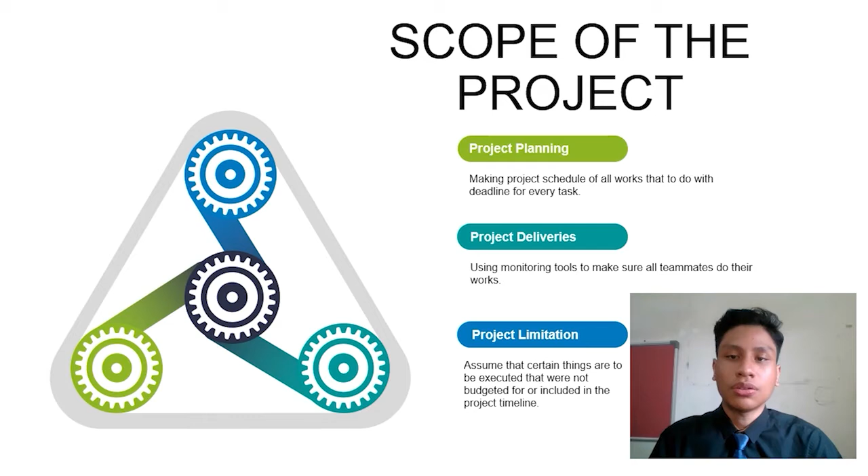Scope of the project. The first one is project planning. Making a project schedule of all work to do with the deadline for every task. And the second one is project deliveries. Using monitoring tools to make sure all teammates do their work. And the last one is project limitation. Assume that certain things are to be executed that were not budgeted for or included in the project timeline.

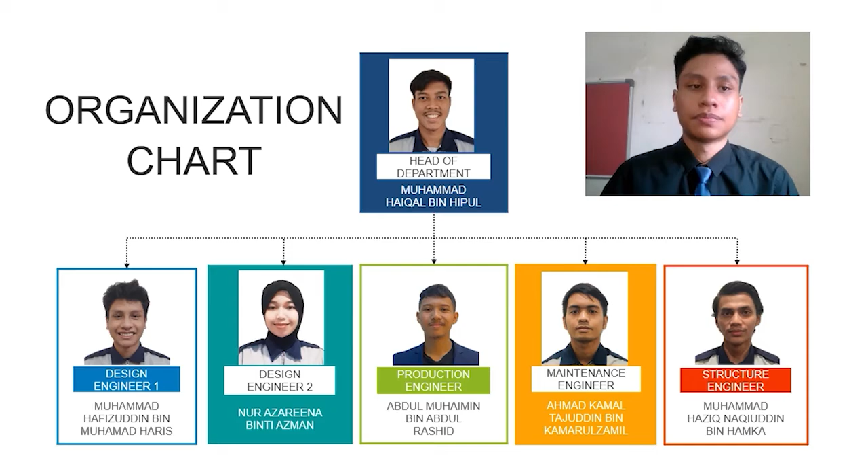Job scope. The head of the department, Muhamad Haiqal, will be in charge of planning the project and monitoring progress. The head of the department will also be in charge of the planning meeting for the mechanical department and ensure all tasks are complete in the time frame. Me as a design engineer will design CAD for main body parts of the product and be responsible to modify the existing product and analyze the main body part.

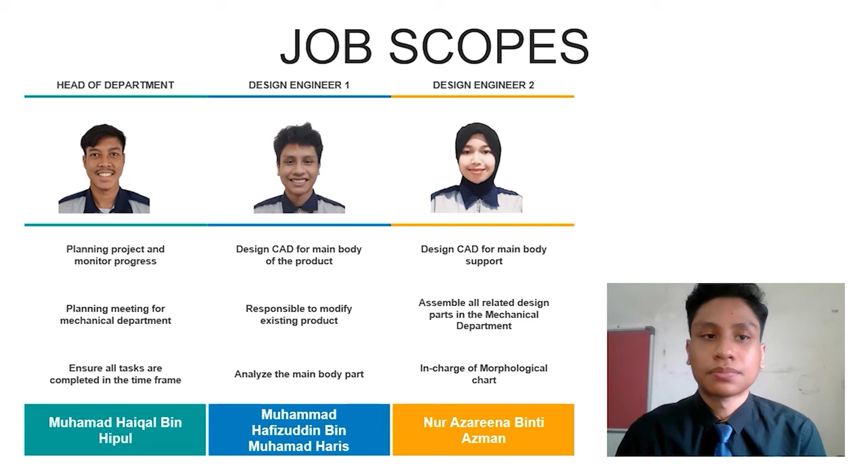Nur Azareena as the second design engineer will design CAD for main body support and assemble all related design parts in the mechanical department. Nur Azareena is also in charge of morphological chart. Production engineer Abdul Muhaimin will be in charge of drafting all design parts of the main body, analyze calculation on the main body, and also estimate budget costing for the product.

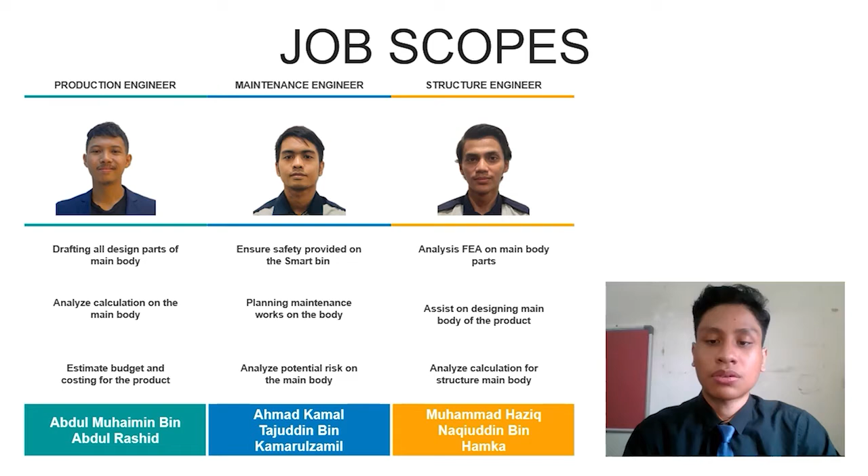Ahmad Kamal Tajuddin as a maintenance engineer, ensure safety provided on the smart bin, and in charge of planning maintenance works on the body, and also analyze potential risks on the main body. Muhammad Haziq Naqiuddin, as a structure engineer, will be doing FEA analysis of the main body parts, assist on designing the main body of the product, and also analyze calculation for the structure main body.

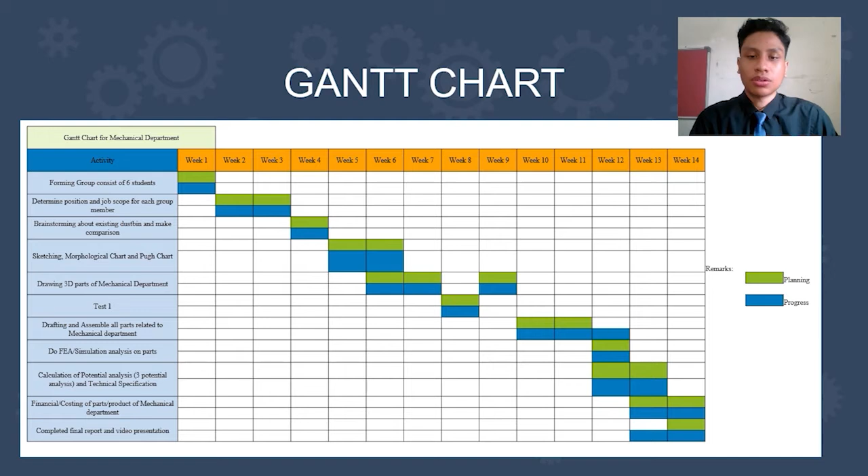Gantt chart is one of the monitoring tools that will be used in our project. Google Meet is one of the platforms that we use to discuss the project. Minutes of meeting are also one of the monitoring tools that we use in our project.

Contingency plan. The first event that we face is the cost to fabricate is too expensive. Search and make a survey from all markets to find an affordable price is our response. The contingency plan is to change the part with different brands with cheap price. And the second event that we face is mistake in product design. Our response is a meeting among team members and seeking help from the supervisor. And the contingency plan is to prepare several designs for the project.

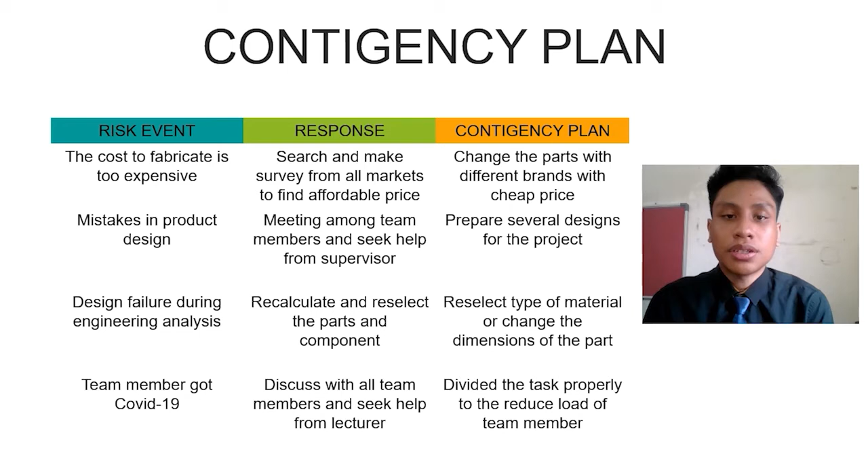The third event that we face is design failure during engineering analysis. Recalculate and reselect the parts and components is our response. Reselect type of material and change dimension of the part is the contingency plan. And the last event that we face is team members got COVID-19. Discuss with all team members and seek help from the lecturer is our response. The contingency plan is to divide the task properly to reduce load of the team.

Assalamualaikum warahmatullahi wabarakatuh. My name is Abdul Muhaimin bin Abdul Rashid. Today I will be presenting about the costing of our product, Smart Tech Bencom. For the costing, there will be 3 categories, which are bill of material, total cost, and the balance sheet. For the bill of material, I will tell you about all the components that we use to construct the product of our company, which is SmartBin.

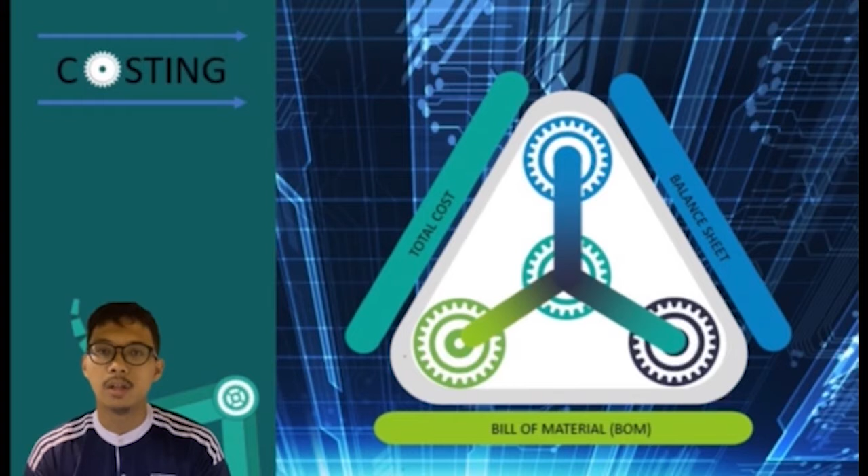For the total cost, I will tell you about the price of each part, and at the end of it, I will tell about the total cost for the whole product. And for the balance sheet, we will tell you about all the assets, all the company liability, and the company debt ratio.

Now I will tell you a little bit about bill of material. First of all, you need to know that we have 15 components. The first component is body, the material is steel, and the quantity used is 1. The second part is back door, the material is steel and the quantity is also 1. Hinge, the material is steel and the quantity we use is 2. For the top plate, the material is steel and the quantity that we use is 4.

For the fifth part is the axle shaft. The axle shaft, the material used is steel and the quantity is 4. For the bolt, the material is steel and the quantity is 16. For the next part is fork. The material is steel and the quantity is 4. For the bearing, the material is steel and the quantity is 4.

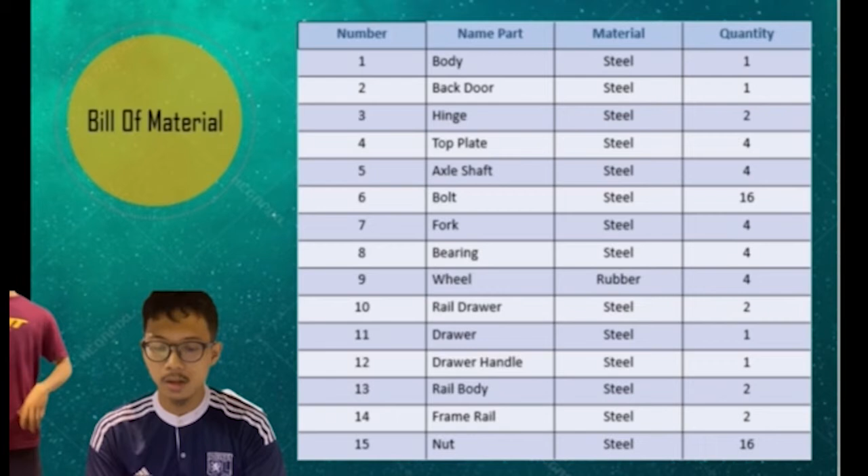For the wheel, the material that we use is rubber and the quantity is 4. For the rail drawer, the quantity that we use is 2 and the material for it is steel. For the drawer, the material is steel and the quantity is 1. For the drawer handle, the material is steel and the quantity is also 1. For the rail body, the material is steel and the quantity is 2.

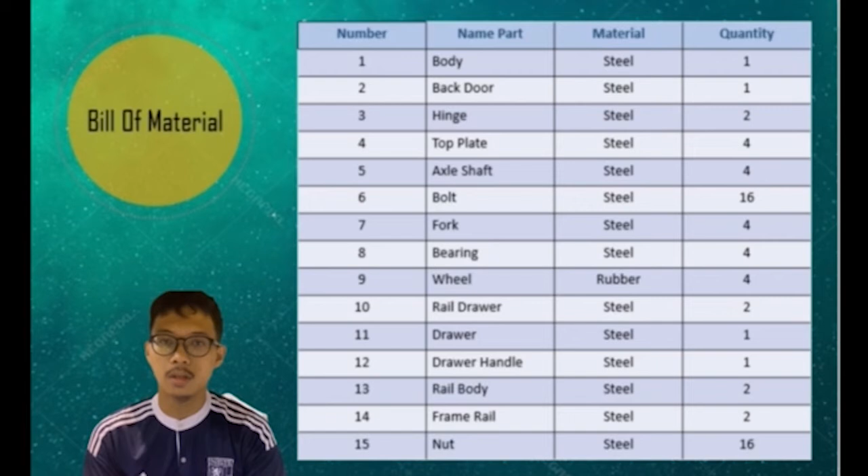For the frame rail, the material is steel and the quantity is also 2. And for the 15th part, the last part is the nut. The nut, the material we use is steel and the quantity of it is 16. The assumed total cost for this product is 350 ringgit.

For the balance sheet, there are 3 things that we need to know, which are assets, liability and debt ratio. For the asset, our company asset is $84. Our company liabilities is $270. And the debt ratio that we have is 3.21. That's all.

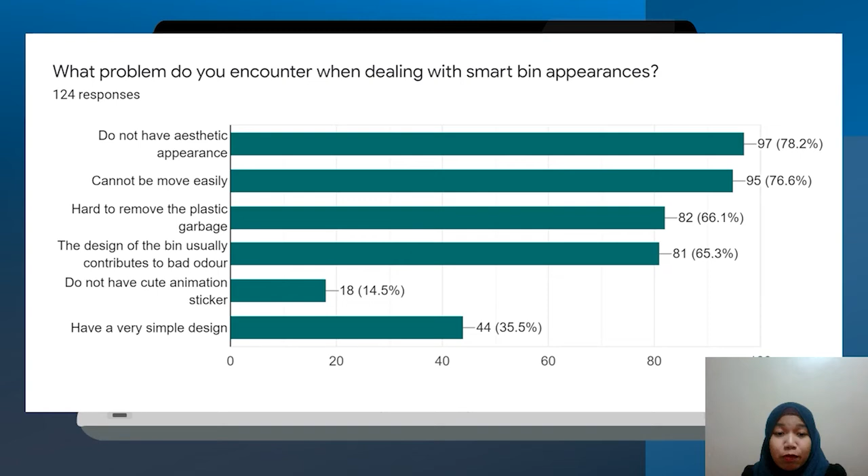Firstly, in order to identify the problem of the smart bin, a survey had been distributed and there are 124 respondents in total. Only 4 high votes had been selected to be the problem statement of the product. Let me explain to you the problem that most of the respondents encountered in a simple way. When you buy something, for example a bin, you tend to buy it based on the attractiveness of the product. Then, as you buy the smart bin, you tend to move it to a suitable place, so you need a bin that can move around easily.

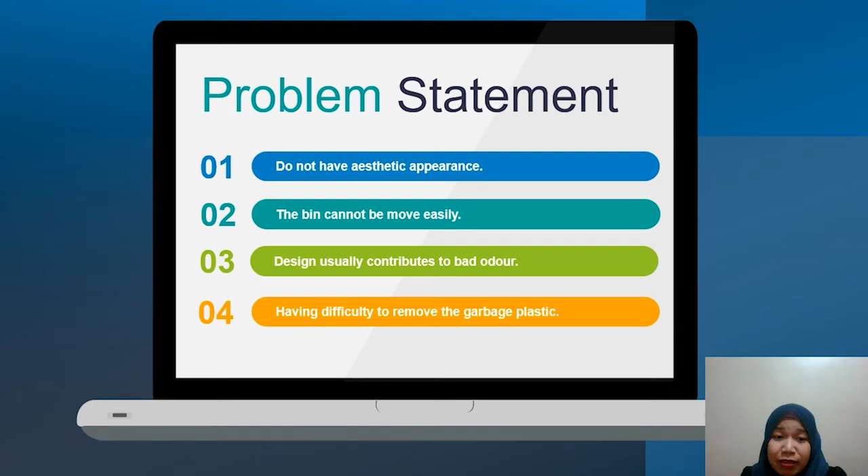When you use the bin, logically it will contribute to bad odor based on the design that the bin used and based on the waste that you have thrown. Once the bin is full, you will collect it and usually the garbage plastic will stick on the surface of the bin. Now, here are the objectives that I had made in order to give solution to the problem. It is basically the opposite of the problem.

Imagine that you will have a smart bin that has aesthetic features which look good in your kitchen. Imagine that your smart bin will make sure that your house does not have bad odors. Imagine that your smart bin can be moved easily from one place to another. Imagine that you can collect the plastic garbage easily from the smart bin.

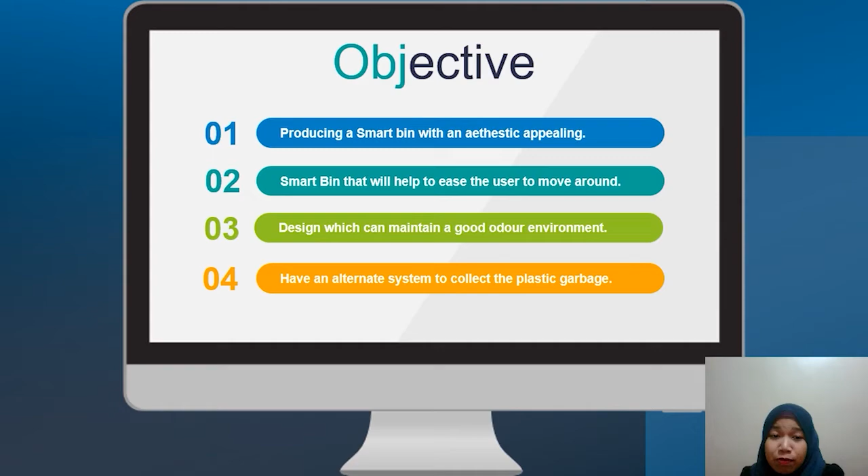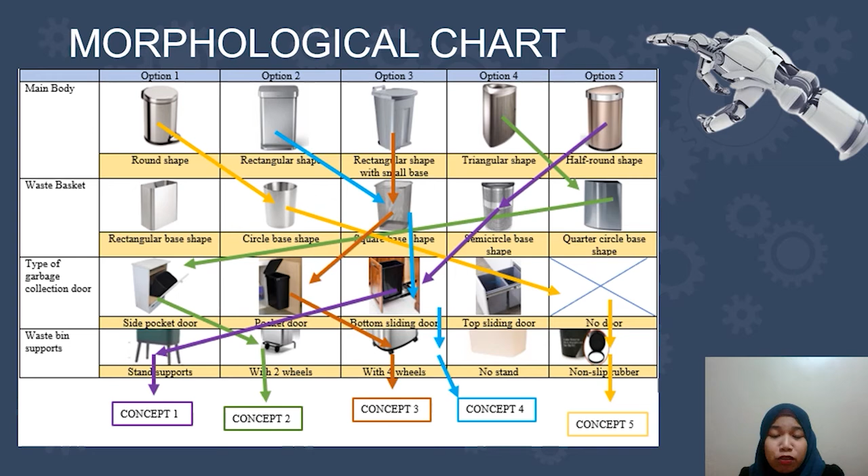As for the concept generation, I had used the morphological chart with random designs of main body, waste basket, garbage collection door, and supports. It will be randomly selected and from that, 5 concepts had been generated in order to be evaluated for the next step, which is product evaluation.

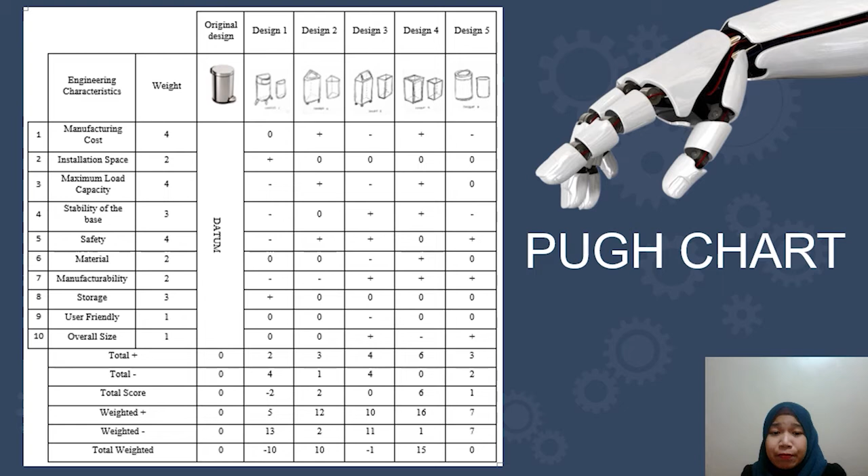As for the product evaluation, I had used the Pugh chart in order to identify the best product. Original design is the datum, the original design being before the improvement and innovation had been made. Based on the Pugh chart, it can be concluded that design four had to be selected because it achieved all the objectives for our expected design.

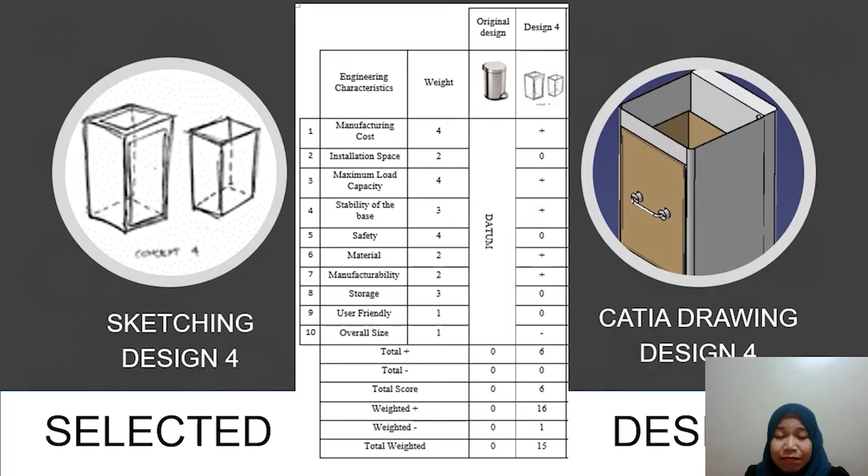The material used to manufacture this product is steel tin plate, which has a stronger yield strength for exerting forces from rubbish. Besides that, it has a useful lifetime up to 10 years. It also has a safety factor in the design that can be a factor of marketability. With the concept of the design, we did improvise with special features to make sure there is an innovation in creating a new design. There are three main parts on our smart bin, which are the main body, a wastebasket drawer, and the swivel caster wheel.

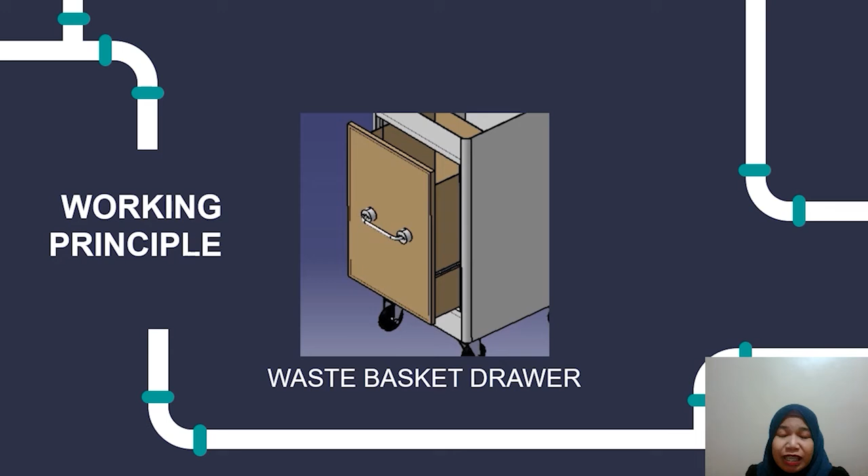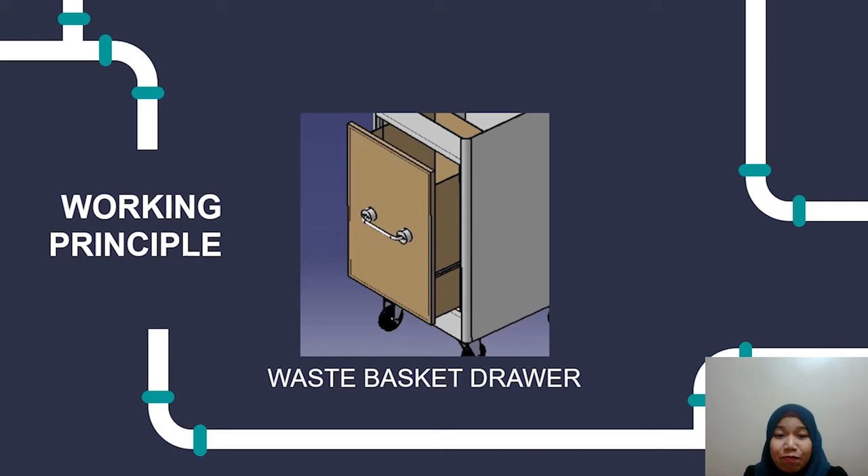Our product has two working principles, one of which is the wastebasket drawer. Our wastebasket drawer can slide easily with the help of the roller. The drawer's purpose is to ease the work of the user in order to collect the plastic garbage without it sticking to the wall. Our wastebasket can also be taken out and cleaned with water. With the wastebasket, users do not have to lift up the entire smart bin in order to wash the smart bin. The next working principle is the swivel caster wheel.

The swivel caster wheel can be moved easily as it can rotate 360 degrees. Thus, it can be moved in any direction that the user wants. The swivel caster wheel will help the user to move the smart bin with ease and convenience. Ergonomically, it also will prevent the user from getting back pain as the user only needs to push the smart bin and not lift it up.

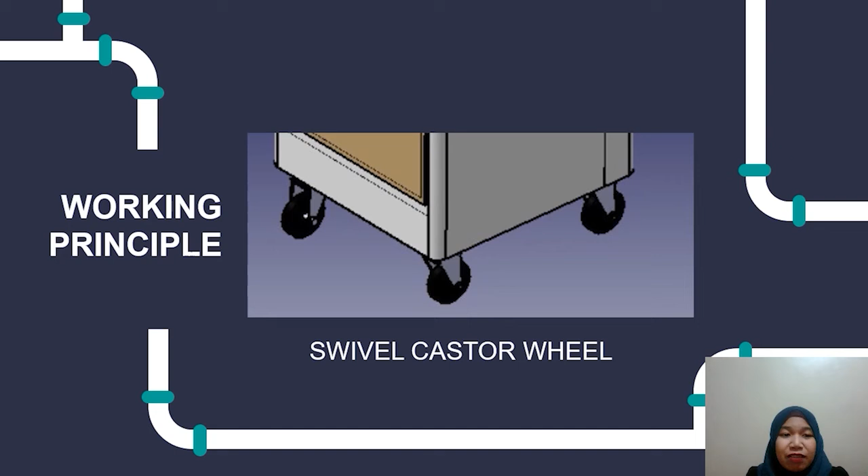So I will be continuing presenting about production of engineering blueprint utilizing engineering software. In this section, I will explain briefly four main components. The first one is the software that is being used for our product design. The second one is the bill of materials. The third one is a drawing template. And last but not least, I will explain to you about the drawing of product part.

So our first part is basically software. As you can see, the software that has been used by our group in the making of product design is CATIA V5 R20. Using this software, we managed to make three things. The first one is CATIA part, the second one is CATIA product, and the third one is CATIA drawing.

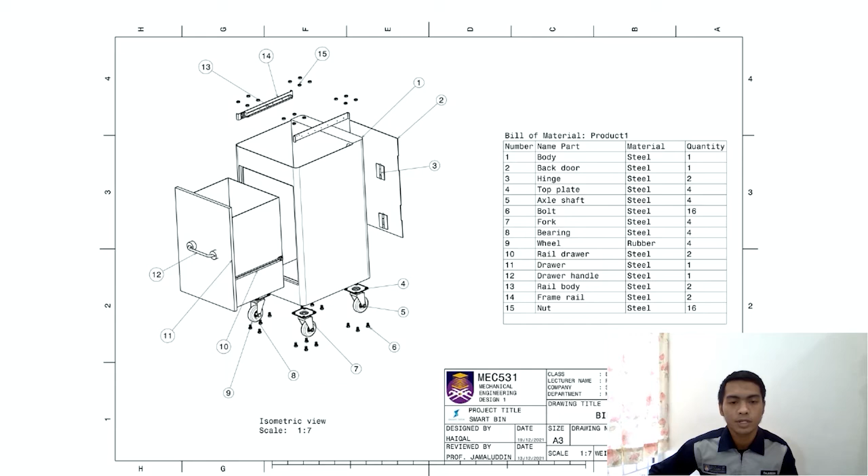Okay, moving on to the next one, which is the bill of materials. As you can observe from the drawing shown on the screen, we have 15 component parts that have been assembled together to make our product, which is the smart bin. There are two types of material that have been used: the first one is steel and the second one is rubber. And all of these components have been assembled using bolt and nut.

Okay, continuing with the drawing template. In this drawing template, the first one is basically the info for our class, lecturer name, company and department. And we also include our university logo with our subject course. The second one is our drawing title. The third one is our designed by and reviewed by column. Number 4 is our scale and weight. Number 5, the last one, is our revision number. We also include the drawing number, as you can see from the example, drawing number 1.

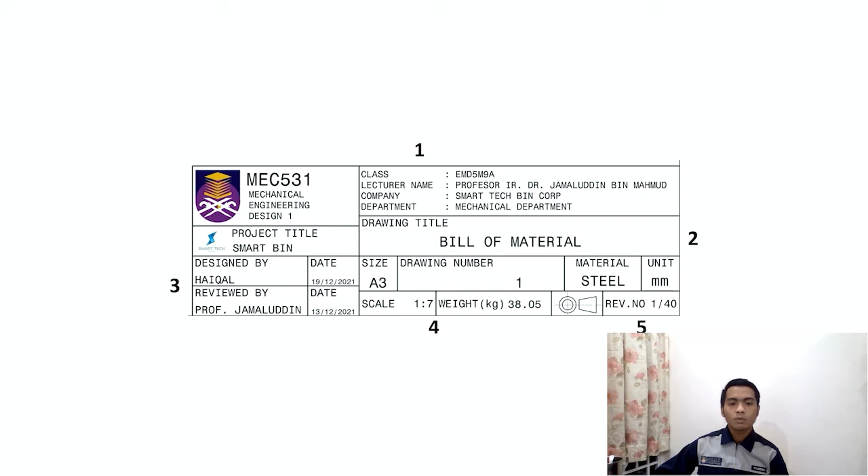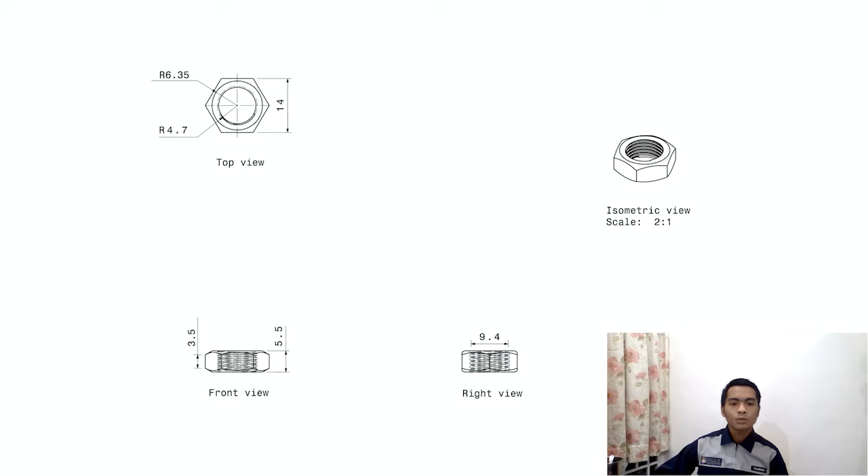Next, we can see from the screen the 4 types of view included in our drawing: the first one is top view, second front view, third right view, and the last one is isometric view. Okay, in this section, I will show you the 15 parts of all components that have been used and drawn by our drafter in the making of our product, which is the smart bin.

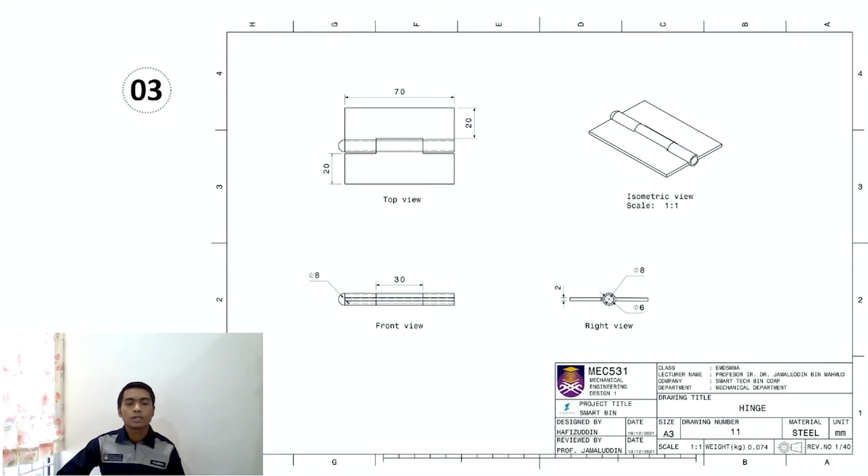As you can see, the first one is our main body. The second one is the back door. Next is our hinge that has been used for the door. The next one is our upper swivel. It's a bracket that is connected with the tire or wheel. The next one is the axle. The next one is the axle shaft. Next one is the bolt.

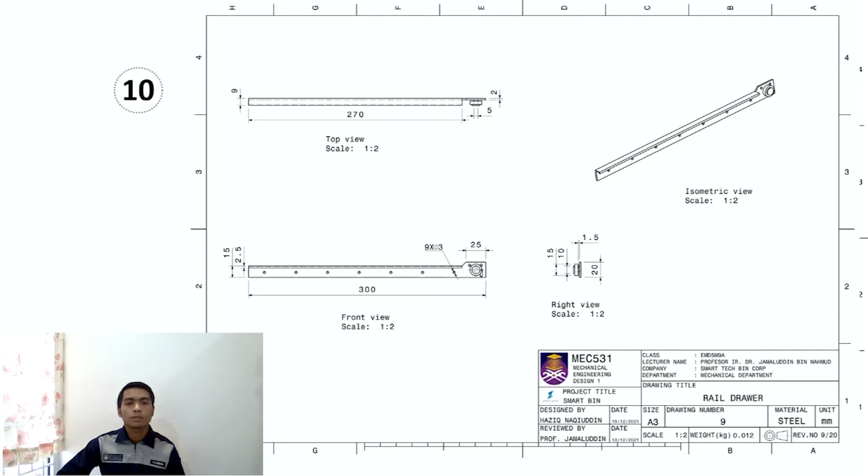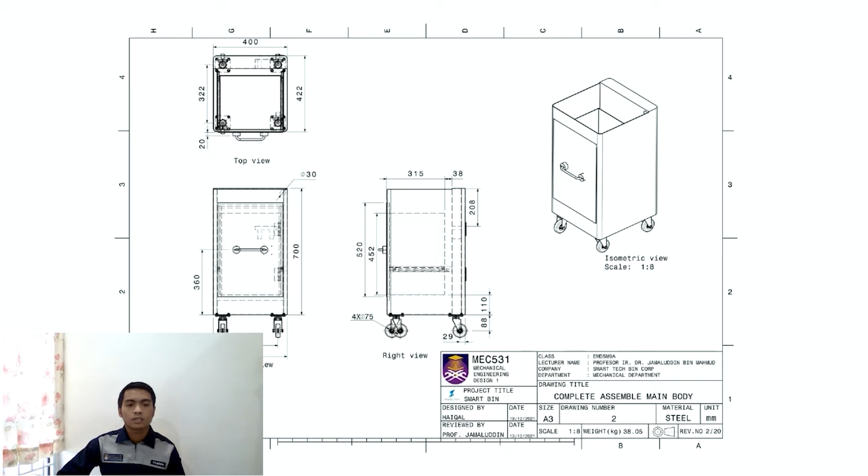This is the lower swivel. The eighth one is our bearing. This is number 9, which is the wheel. And number 10 is the rail drawer. 11 is the drawer, then door handle, rail body, frame rail, and last but not least is the nut. As you can see from the screen, this is our final product, which is the complete assembly of all 15 parts.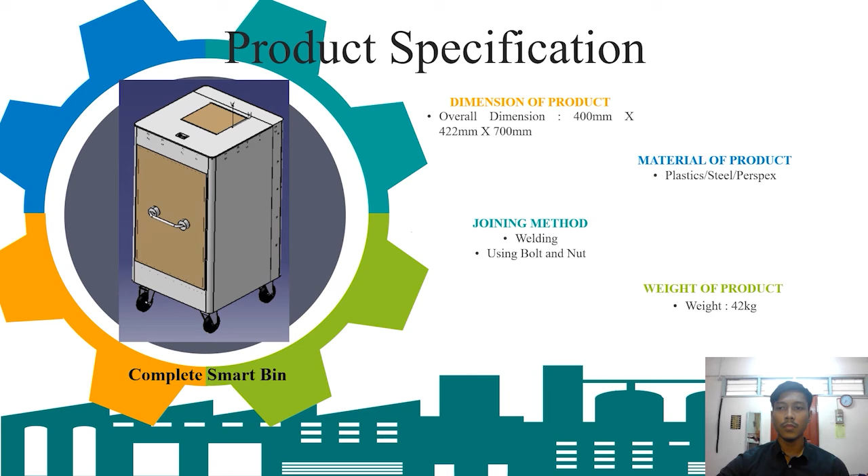Next product specification is the main body of SmartBin. The dimensions stated are the depth, dimension 1, dimension 2 and chamfer edge. For the 4 chamfer edges we use radius 20 mm. For the joining method, we use welding and bolt and nut. For the material, we use plastic, perspex or steel, or we can combine two of these materials, such as plastic with perspex or steel with perspex. And lastly, the weight of the main body is 22 kg.

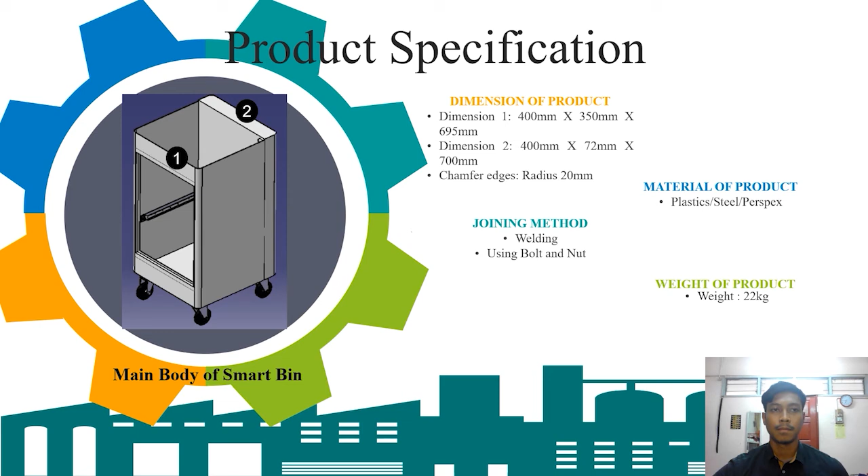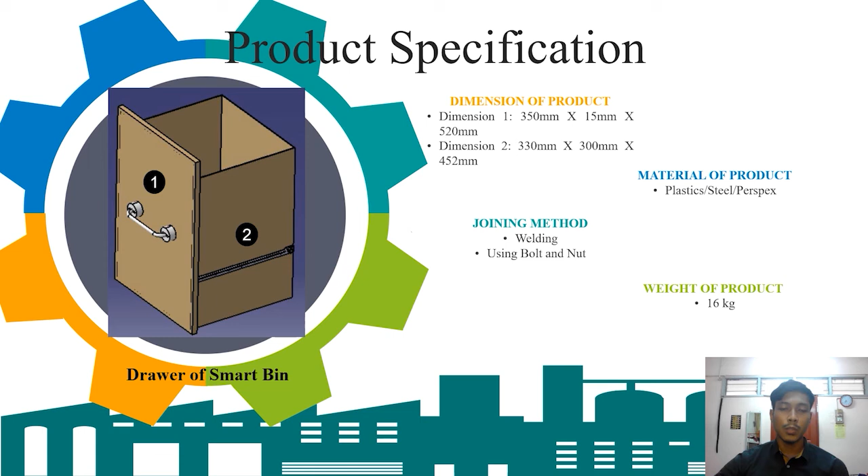Next is the drawer of SmartBin. The drawer of SmartBin is the same: we use plastic, steel or perspex, or a combination of two materials. The weight is 16 kg. Next, let's go to the features and performance. There are three features: the drawer and rails, back door and wheel.

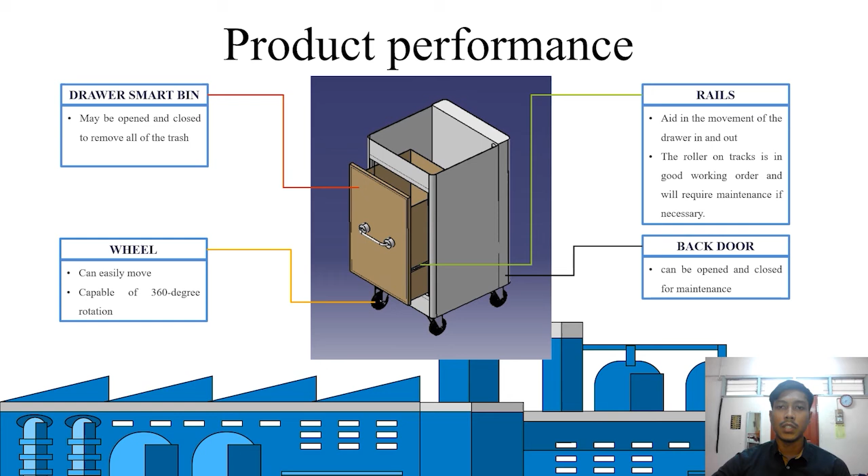Next, let's discuss the SmartBin performance. To begin, there is a SmartBin drawer that can open and close to eliminate trash. The SmartBin is easy to move and can spin 360 degrees thanks to its swivel or trolley wheel. Finally, if necessary, the rail that assists in the movement of the drawer in and out must be maintained. Furthermore, the back door must be opened and closed for maintenance purposes, such as the pump, hose and timer.

Next, let's go to the safety features. Last but not least, this bin has a number of safety features. To begin, create a curve or spherical form at the main body's end. The goal is to protect the user while also improving the user's surroundings. Second, a 360 degree rotating trolley and swivel wheel has been added under the main body, allowing easy mobility while carrying a high weight.

The wheel's bearing, on the other hand, ensures that the wheel runs smoothly because bearings can reduce friction and allow smoother spinning. Finally, nuts and bolts are used to hold parts or components together, providing clamping force and preventing axial movement.

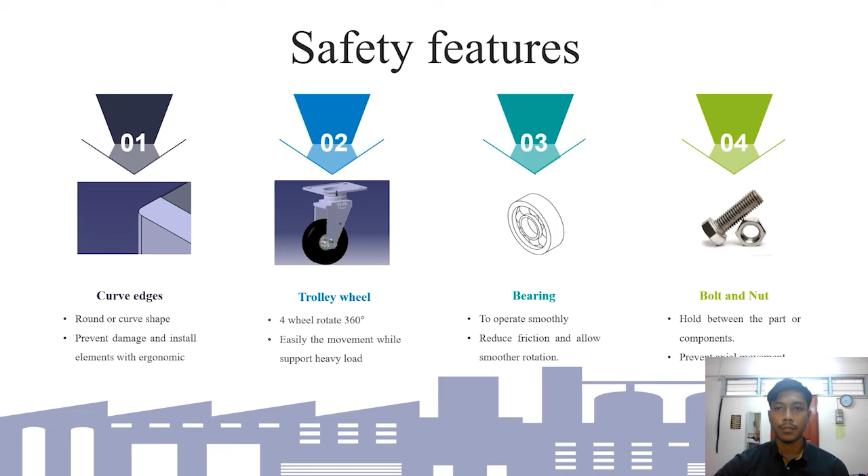What is the part we are focusing on? We analyze the critical part in the SmartBin to find the suitable load that our SmartBin can sustain or support. There are three parts that need calculation, which are structure, welding because we use steel, and a bearing. While for FEA, we analyze two parts, which are the frame rail and the rail main body.

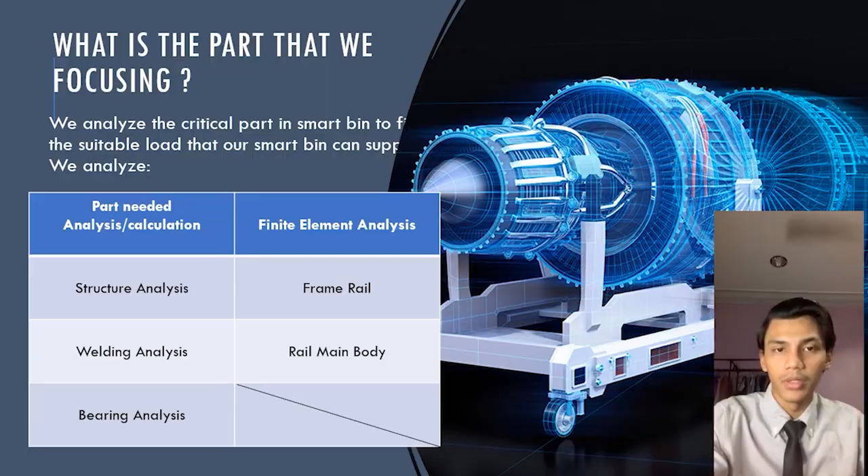For the structure analysis, because we assume the drawer will carry a load of 88.29 Newton, each frame will have 44.145 Newton. From the equilibrium equation, the shear force acting on the frame was 44.145 Newton. And also from the equilibrium equation, we get the moment acting on the frame, which is 0.53 Newton meter.

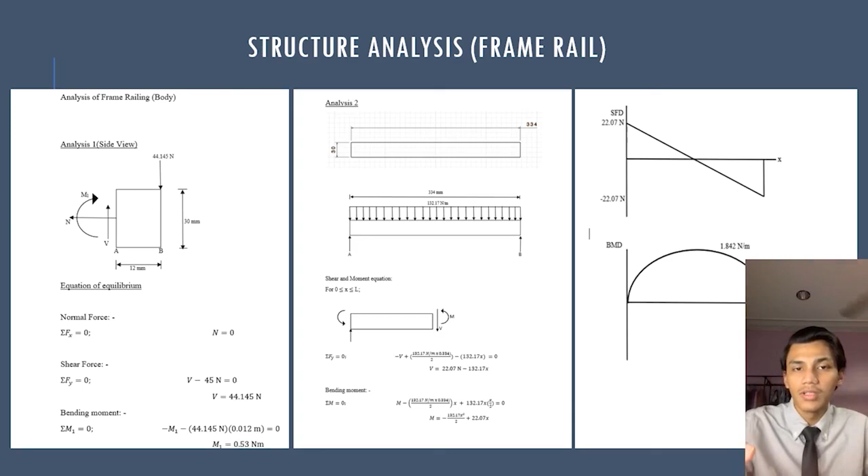And for analysis 2, we assume the distributed load was 132.17 Newton per meter. Because the distributed load is from 0 to the length of the frame, which is 334 mm, there is only one cutting section. From the cutting section, we get the shear and the moment equation. And lastly, these are the shear force diagram and the bending moment diagram that we get. If we observe, the shear and bending moment diagrams were in equilibrium, so it was a good analysis. Next, we proceed to the welding analysis or calculation.

The width of the weld was 396 mm. Because we weld the plate on two sides, it is a fillet weld. Each side has the same strength and analysis. The total length of one side of the weld was 2188 mm. As you know, total length is equal to the effective length. Then we assume the size of the weld was 5 mm and the mass was 70.355 kg.

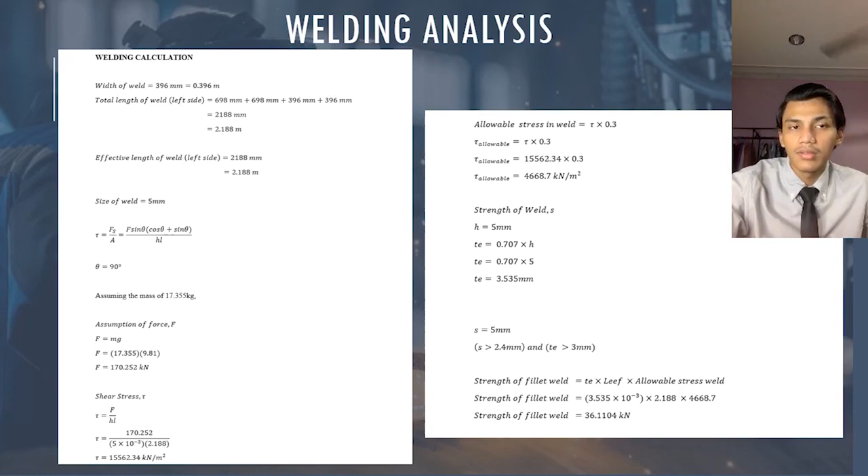We calculate the shear force by assuming theta was 90 degrees. As you know, the standard safety factor is 0.3. So we multiply the shear force with the safety factor to get the allowable stress. In order to find the strength of a fillet, we need to find the strength of a weld first. Then, by using the strength of the fillet, we get the value of 36.1104 kN. For the bearing analysis or calculation, we use a deep groove bearing 6000.

We assume axial load Fa is 87 Newton and the radial load Fr is 175 Newton. From the specification table of the bearing, the chosen bearing is 6000. From there, we get the basic load rating, which is Cr 4.582 kN and Cor is 1.971 kN. While the factor obtained is 12.4, values X and Y are obtained by comparing the value of e and the value calculated from the factor multiplied by Fa and divided by the rating load Cor via proportional interpolation. The result of X is 0.56 and the result of Y is 1.82.

The next step is to calculate Pr, which is the dynamic equivalent load. By using Pr equal to X Fr plus Y Fa, we get the dynamic equivalent load. And lastly, for the service life, we use the service life equation and we get the final answer of 31,730.9 hours of bearing life.

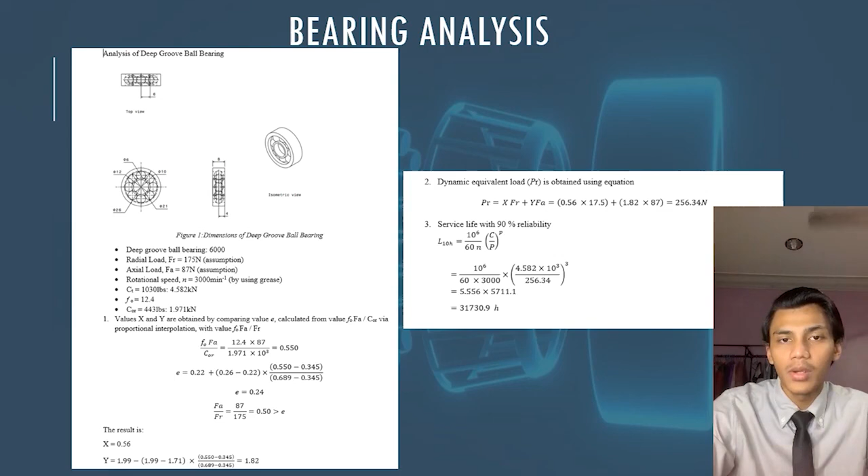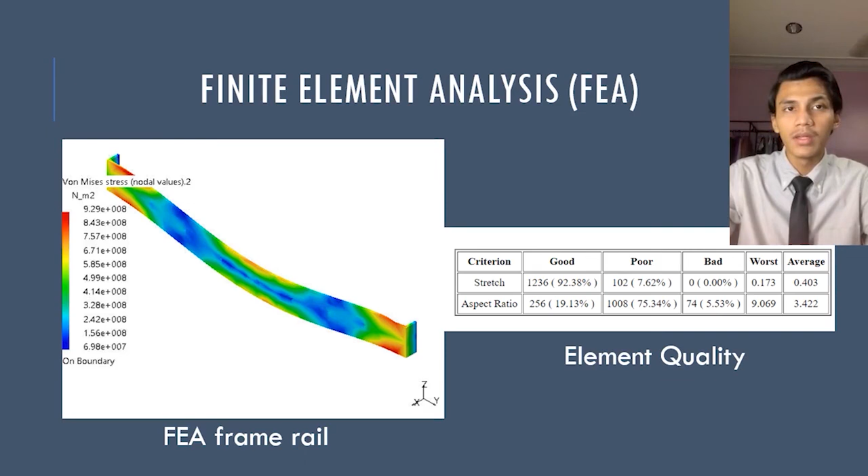For the finite element analysis, the first part is the frame rail. The element quality is generated in the static analysis. From there, we can know the criterion of a part, whether in good, poor, bad or worst condition. As we can see, 92.38% of the part was in good condition. And from the von Mises stress diagram, only a little of the red region showed stress compared to the blue and the green regions. So, the part will sustain the assumed load that we calculated before in the structure analysis.